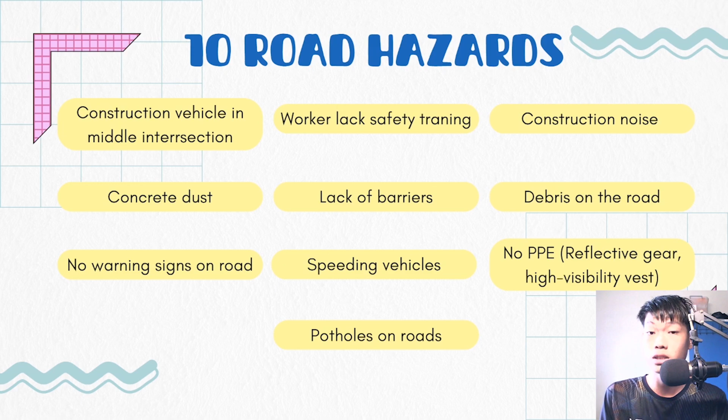Now I'm going to talk about the first road hazard, which is construction vehicles in the middle of intersections. Before I explain, let us watch the YouTube video first.

After watching the video, you will notice there is a construction vehicle stopped at the middle of an intersection. This is a very dangerous situation as it blocks the driver's vision, making it hard for the driver to make a turn, because they cannot see a car coming from the opposite direction. This will cause a major tragedy if a car coming from the opposite side drives out from behind the construction vehicle—they will collide and cause an accident, causing fatal injury or even death. That is something we need to avoid as employees in a road construction area.

So what should we do? Workers should stop their construction vehicle somewhere it will not block the vision of drivers on the road, and stop it somewhere safe. This will prevent any accident from happening.

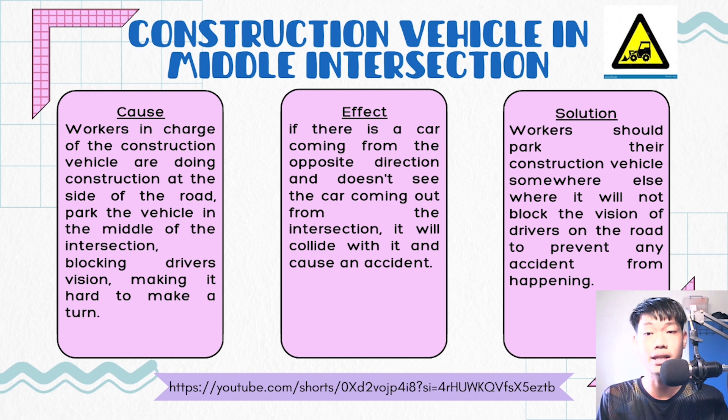The second road hazard is workers lacking safety training. Before I explain about this, let us look at the video first.

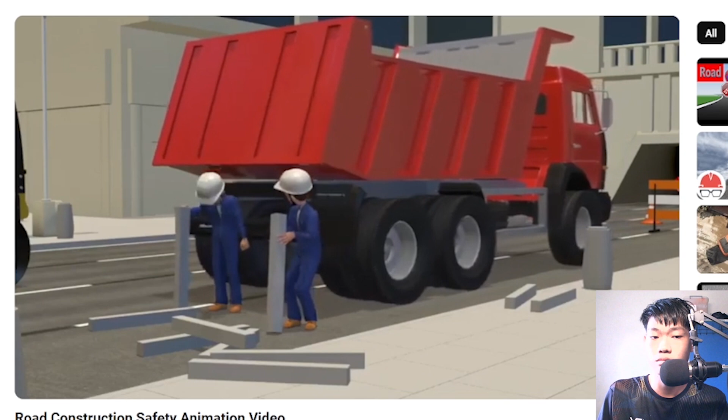After watching the video, you will notice the worker driving the vehicle is reversing without looking at the side mirrors. This causes the employee behind it to be crushed under the vehicle. This dangerous action is caused by the worker lacking safety training, and at the same time there is a lack of specific instruction for the action. The lack of an instructor is also dangerous, as no one is giving signals for the worker to reverse the vehicle when intended.

So what should we do? Let us look at the video again.

As you can see, after receiving more safety training, the workers now have an instructor to give specific instructions for workers to take action. This makes the job safer and more efficient. The instructor will give specific instructions to the worker to reverse the construction vehicle only when the area is secure. This can prevent any unnecessary accidents.

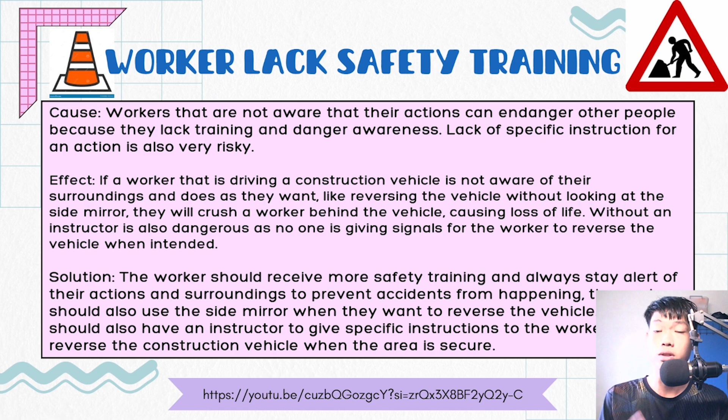I'll be presenting about the road hazards of lack of barriers and debris on the road.

For lack of barriers, there are many causes. It can be caused by poor infrastructure planning, where planners fail to prioritize safety features such as guardrails and protective barriers. Workers involved in road construction and maintenance may also lack the necessary training to ensure safety features are properly installed.

The effect is that vehicles are more likely to veer off the road, causing accidents, especially near curves and cliffs. Lack of barriers can also cause crashes leading to severe injuries or death.

For the solution, they can install barriers, guardrails, and hazard signs on all high-risk roads, and allocate more budget toward the development and maintenance of road safety features.

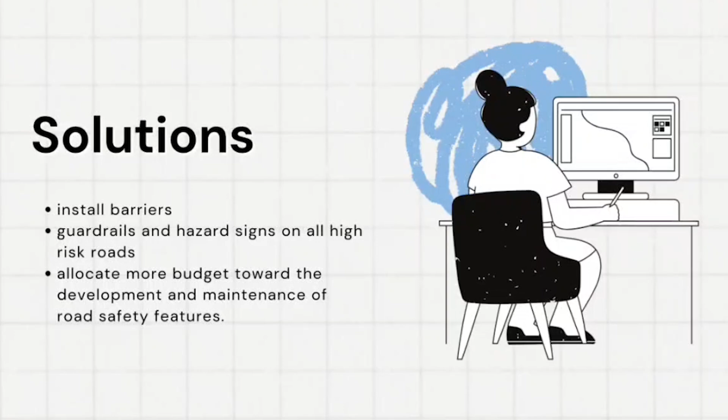This is an example video showing a road with no barriers, which is a high-risk road.

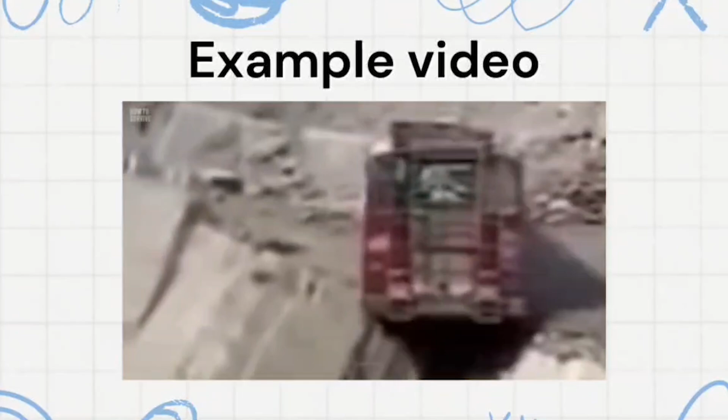So next, it will be debris on the road.

This can be caused by illegal dumping of trash along the roadside, littering, and lack of regular road inspection and cleaning. The effect is vehicles may swerve to avoid debris, leading to collisions or loss of control, and sharp objects like glass or metal can puncture tires and damage vehicles.

So the solution is they can implement scheduled road inspections and cleaning to remove any debris.

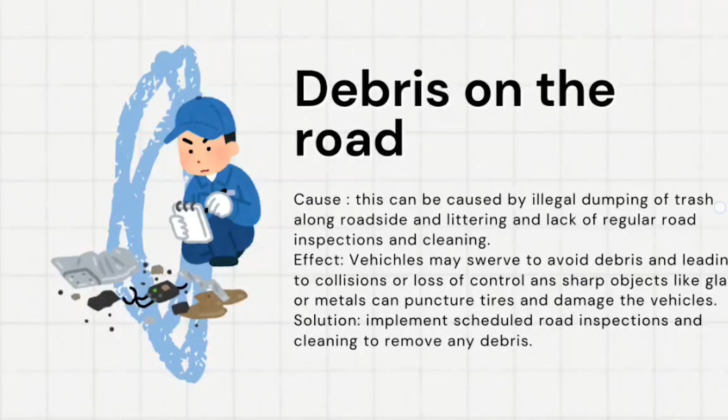That is why scheduled maintenance and checking are very important. Thank you very much.

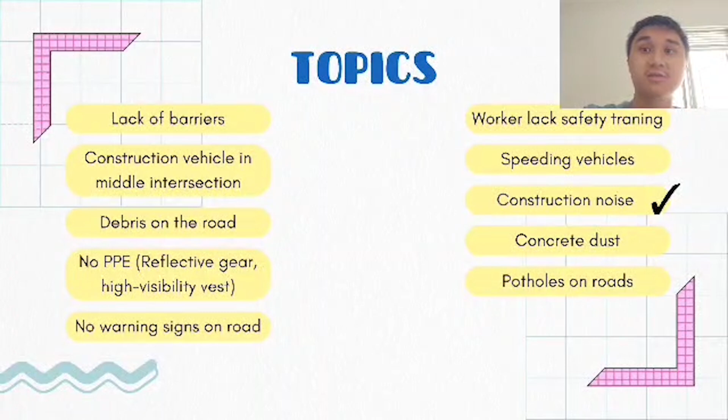Now I will discuss the construction's noise and concrete dust. Let us talk about the construction's noise first. Let us see the video.

Construction workers are doing good work, but they are creating noise that disturbs the peace of nearby residents at night. The effect is, if construction continues at night, the loud noise will disturb nearby residents, who did not have a good sleep when construction is still happening at night.

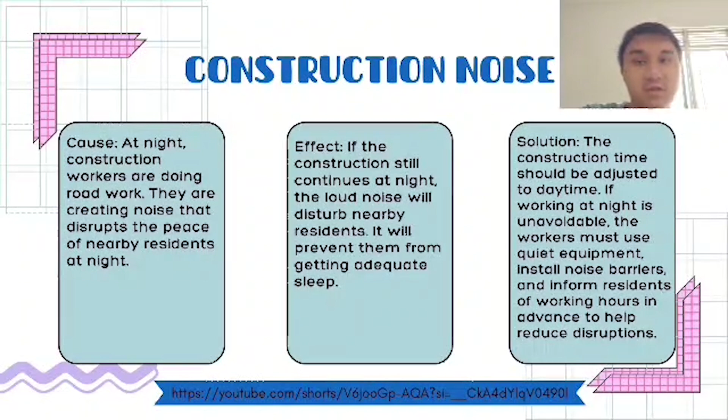The solution is the construction's time should be adjusted to daytime. If working at night is unavoidable, the workers must use quiet machines or quiet equipment, install noise barriers, and inform all nearby residents of the construction's working hours in advance to reduce disruptions at night.

Next I will discuss the concrete dust. Let us see the video first.

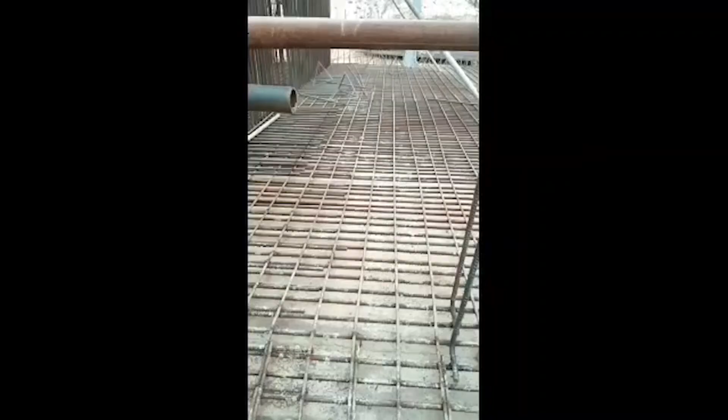In the video, the cause is that in the construction area, the workers did not wear any safety items such as face masks, face shields, safety clothes, and other necessary protective gear. The effect is that the lack of safety equipment exposes workers to potential injuries, health risks, and accidents.

It will increase the serious injuries and cause long-term health problems for the workers. Over a long time, they may get health issues such as coughing or even heart attacks.

For the solutions, the construction company should enforce strict safety regulations and ensure that all workers are provided with and required to wear appropriate safety gear like safety shoes and safety helmets. Besides that, the workers need safety training sessions.

The company needs to train their workers about safety issues, and inspections should be conducted to ensure compliance. The company should do inspections during construction to ensure all workers have followed the safety guidelines set by the company.

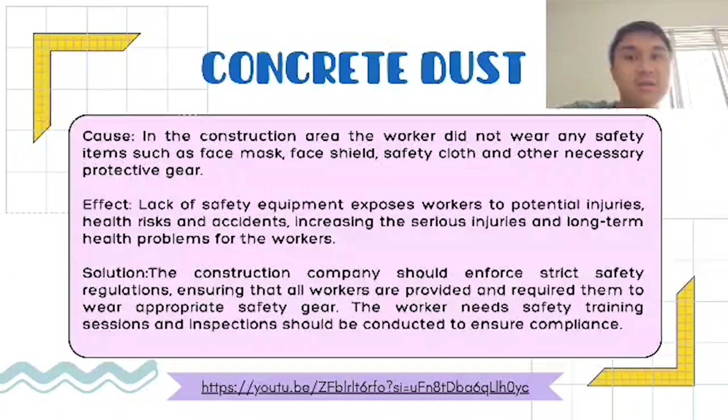So that's all my part.

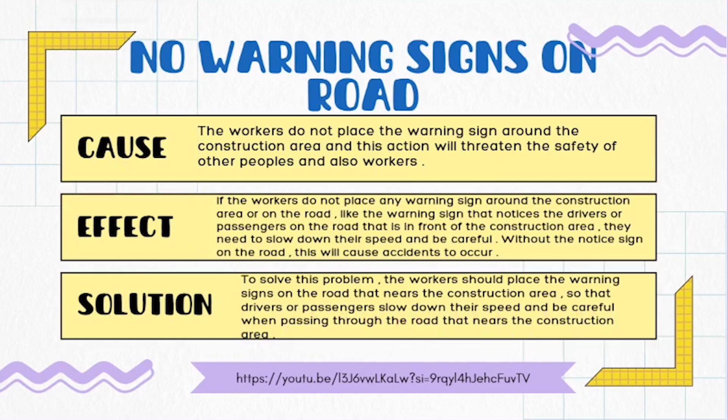Next time you're on the highway, you might notice these warnings. They read, behind work zones are working people. MassDOT is posting them to remind drivers to go slow and be alert when driving through a construction area. This past June, a MassDOT worker was struck and killed by an alleged drunk driver.

Next, I will talk about speeding vehicles. The causes of this hazard: the road near the construction area does not have any warning signs or speed bumps, so this causes vehicles passing through to not slow down their speed.

So the effect of this hazard: if the road that nears the construction area does not have any warning signs and speed bumps, this will increase the probability of accidents and injuries happening.

Because drivers do not slow down their speed, and if there is a hole or obstacle on the road, to solve this problem the workers should install a speed camera and set up the speed limit on the road near the construction area so that vehicles passing through will slow down. This will reduce the probability of accidents and injuries occurring, and the safety of drivers, passengers, and workers will be ensured.

They can also set up a roadblock so that drivers and passengers will notice that in front of them is a working area, so they won't drive fast and will be careful. Now I will show you examples to solve this hazard.

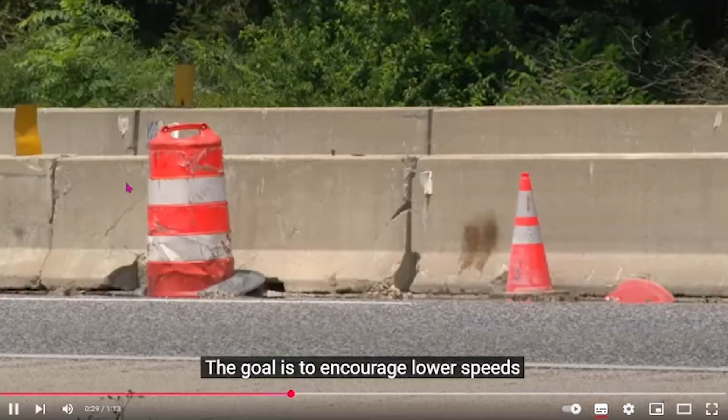If you go over 11 miles over the speed limit, the camera takes a picture of your rear plate. For now, drivers will only get a courtesy warning in the mail for the next 30 days - no ticket, no automatic ticket just yet. The goal is to encourage lower speeds to increase safety in those construction zones.

Now I will pass it to my teammate to continue with other road hazards.

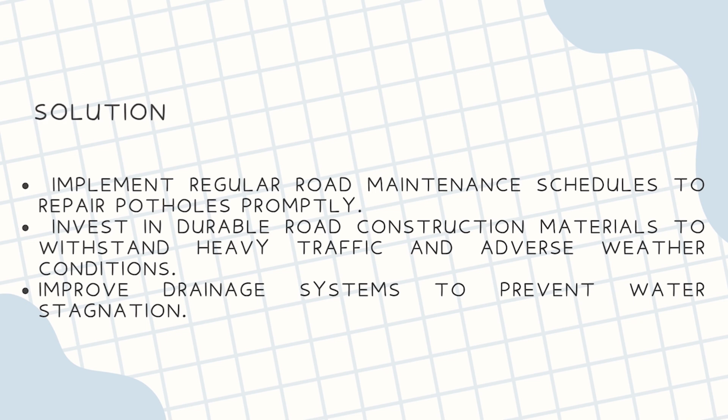Then let's watch the example video.

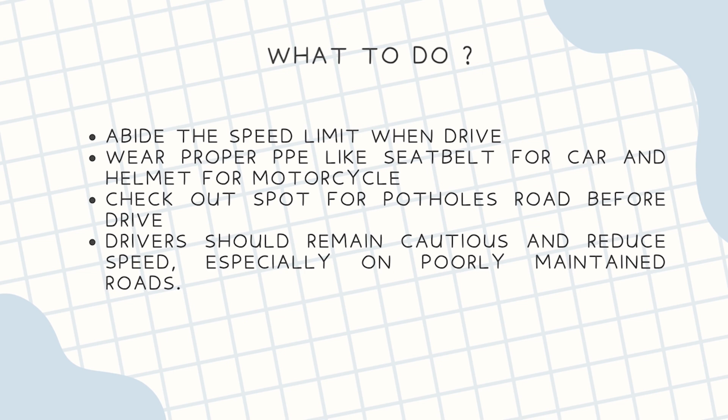The second hazard is not wearing PPE, which is reflective gear or a high visibility vest. The cause of this hazard is workers not wearing reflective vests during road construction at night, making it hard for road users to notice them. The effect is drivers traveling at high speeds at night, especially when distracted, may fail to see the workers, increasing the risk of collision.

The solution is workers need to wear reflective vests and use signboards when doing road construction to allow drivers to easily notice them.

Then let's watch the example video.

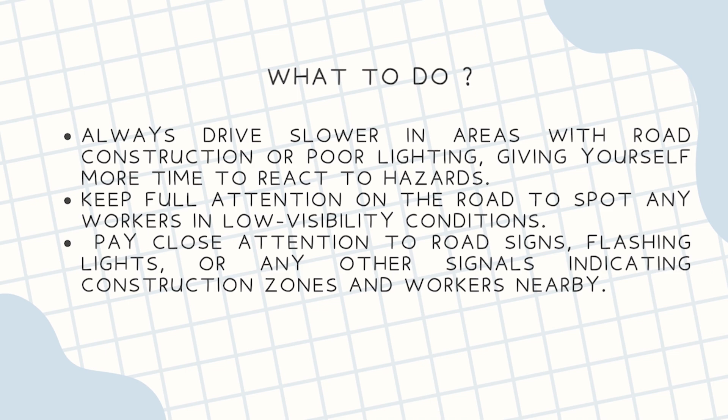That's all from me, thank you.

That is the end of our explanation. I hope that after watching this video, you as an employee will listen to our instructions and keep track of those 10 road hazards, and prevent any accidents from happening to create a safer workplace for employees. Thank you very much.